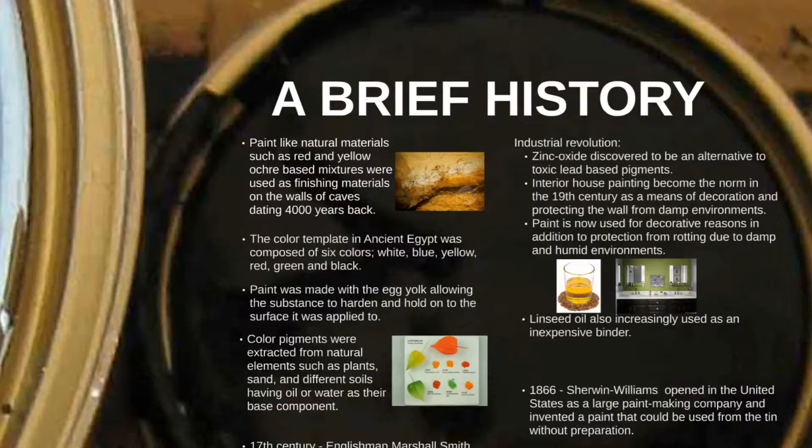Painting was used as a finishing material on the walls of caves at a time which dates as far as 4,000 years back. Back in the days, paint was made of natural materials such as red and yellow ochre.

Here are some historical facts that could sum up the evolution of painting over time. In Dendera, colored walls were found from 2,000 years back that remain very vivid until today. That is because a gummy substance was applied to the paint.

The color template in ancient Egypt was composed of 6 colors: white, blue, yellow, red, green, and black. In the painting process, they started by painting the entire wall in white, then tracing the outline of the design in black.

In Rome, paint was made with egg yolk. Therefore, the substance would harden and hold on to the surface it was applied to. As for color pigments, they were extracted from natural elements such as plants, sand, and different soils having oil or water as their base component.

England in the 17th century was very innovative in terms of its painting techniques. Marshall Smith invented a machine or engine for the grinding of colors in the year 1718. The operating process of this painting mechanism still remains unknown. However, that device increased the efficiency of pigment grinding drastically.

That machine was also very economic, and soon Emerton and Manby Company started advertising economic and low-priced paint that was ground using a labor-saving technology.

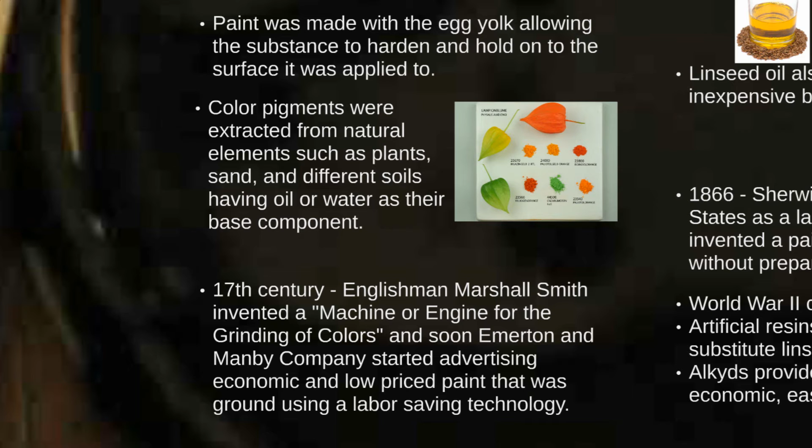The Industrial Revolution played a role in the production process of paint. During that time, paint was being ground in steam-powered mills. Zinc oxide was discovered to be an alternative to toxic lead-based pigments.

With the rise of technology, interior housing painting was becoming the norm in the 19th century onwards, paint being used for decorative reasons as well as for the protection of the wall from rotting due to damp and humid environments. Linseed oil was also used increasingly as an economic binder.

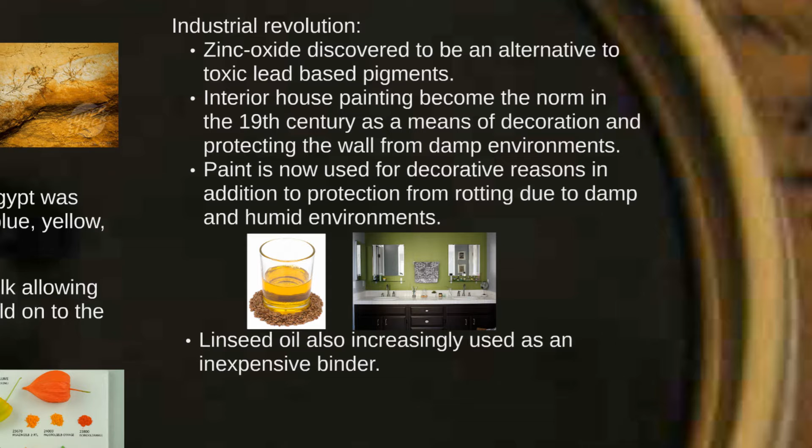In 1866, Sherwin-Williams in the United States opened a large paint-making company and invented a paint that could be used from the tin without preparation. This made things a lot easier for the user and gave more room for being able to paint one's home without the help of an expert or professional painter.

Last but not least, after World War II created a shortage in linseed oil, artificial resins and alkyds were invented to substitute linseed. Alkyds provided a base that was cheap, economic, easy to make, and durable.

Paint can be classified in 3 ways. The first is into architectural and industrial paints.

Under architecture, we have synthetic alkyd-based paints, emulsion paints, synthetic varnishes, processed oil and oil-based paints. And under industrial paints, we have automotive stoving paints, automotive refinishing paints, stoving electrostatic enamels, metalwork stoving enamels, wood finishes, heavy-duty paints, marine paints, and general industrial paints.

Matte paint, as the name suggests, is characterized by being flat or not shiny. It has an advantage of hiding imperfections such as brush marks. It is used for interior walls and painted ceilings. Matte paint should not be used in kitchens, bathrooms, or kids' rooms, as it does not wash out well.

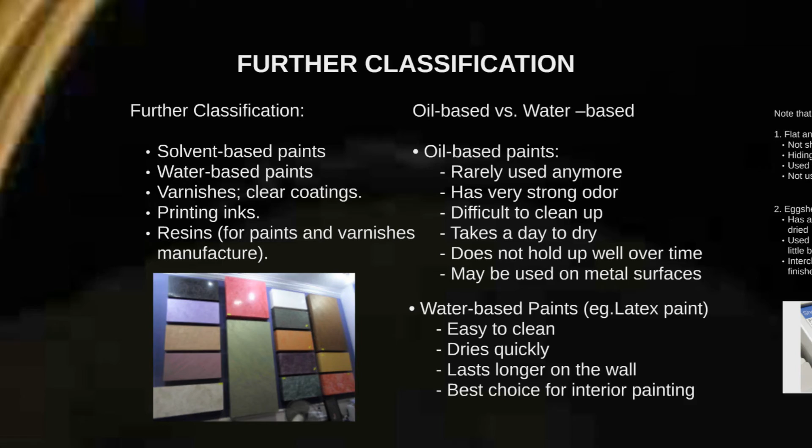Oil-based paints are rarely used anymore. They have a very strong odor and are difficult to clean up. In addition, they take long to dry and do not hold up well over time. On the other hand, water-based paints such as latex paint are easy to clean up, dry quickly, and last longer on the wall. They're the best choice for interior painting.

Pigments are solid particles that reflect the light rays in various manners to help prolong the life of the color of the paint and protect metals from corrosion. They have a general requirement of being opaque, chemically inert to secure stability in the bind, non-toxic, and low cost.

Pigments can either be organic or inorganic. Organic are more preferable due to their availability and greater benefits.

Solvents are the volatile part of the mixture dedicated to dissolving the binders, adjusting the viscosity, and maintaining a uniform thickness to the final coating of the painted surface. They can be classified mainly in the local market as mineral spirits, or xylene and toluene.

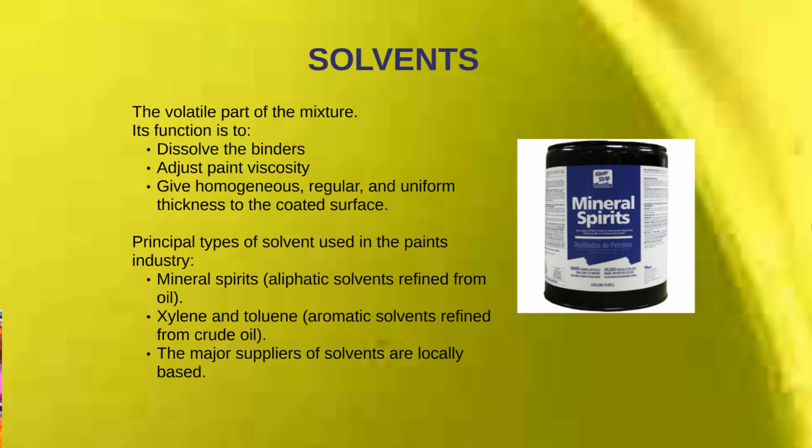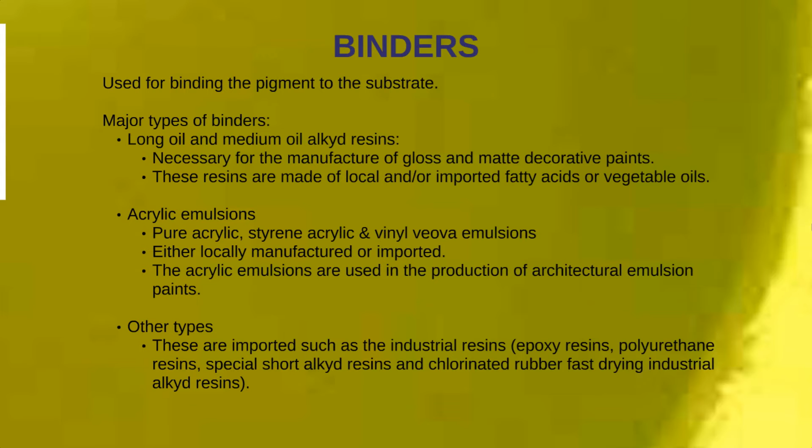The key to the paint mixture is the binder, which creates the bond between the pigments and the substrate. Three major types of binders include long oil and medium oil alkyd resins, acrylic emulsions, and other industrial resins.

Additionally, other materials such as additives, fillers, or extra raw materials are added into the mixture. The main additives seen in the industry are wetting and dispersing agents, anti-foaming agents, anti-skinning agents, dryers, anti-settling agents, plasticizers, fire retarding agents, and various other examples.

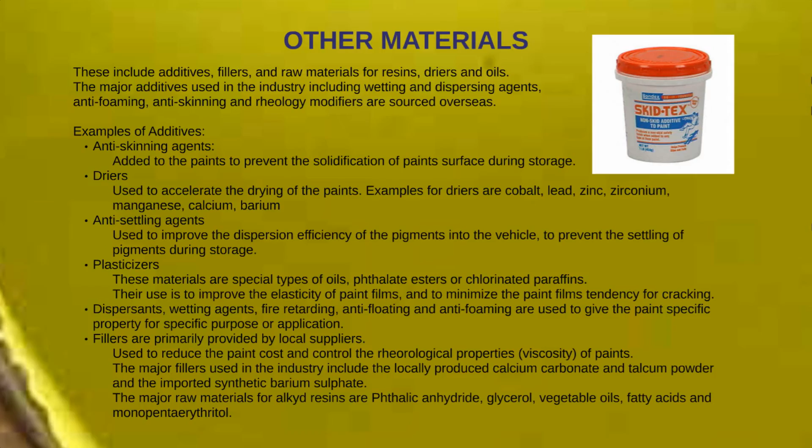Of the finishing equipment to be discussed, the primary tool is the paintbrush, mainly found in three different types, each intended for a different use. All have the same technique in their use and maintenance. Avoid dipping the full bristles into the paint, and they must be washed with gasoline, followed by soapy water, plain water, dried, and finally wrapped in a clean cloth.

Secondly, rollers, coming in various sizes, are used for covering larger spaces in a short period of time. Knowing this, it is not an efficient tool for corners. However, they can come customized with patterns for a decorative, hassle-free finish.

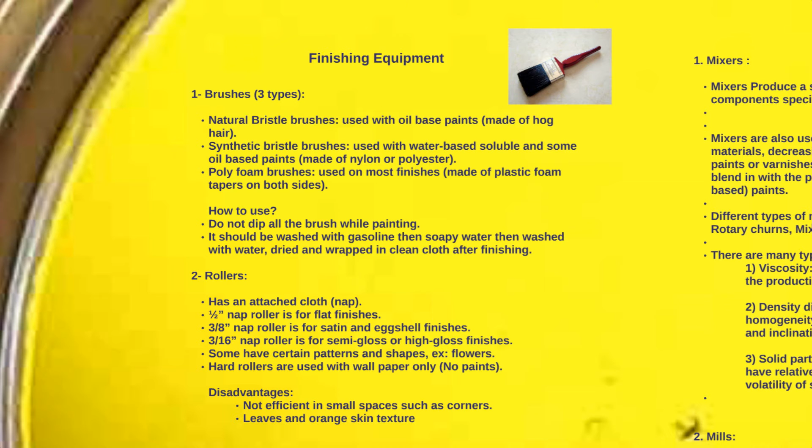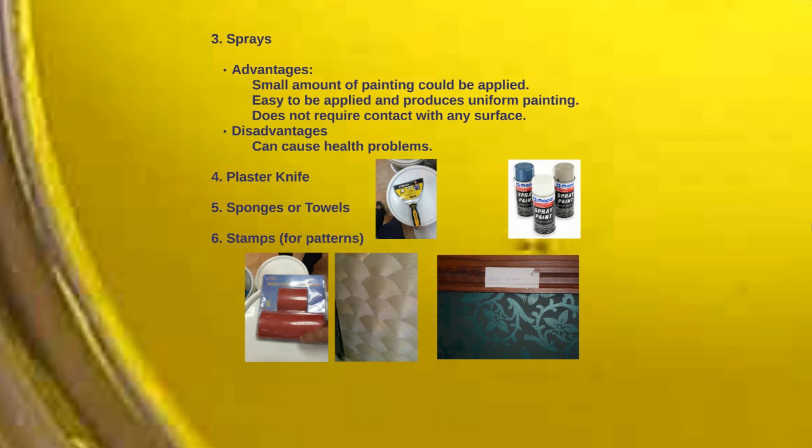For a fast-drying, uniform covering, spray paint is a suggestion, despite the health-impairing fumes it is known to discharge. Other tools include a plaster knife, sponges, towels, and stamps.

Upon creating the actual paint that is required, a mixer is used to combine the various components of paint discussed previously to create a homogeneous blend. Different types include manual, automatic, kneaders, colloid mills, rotary churns, or just mixing by air streams. The selection of a specific mixer is to be used depending on the intended viscosity, density, and solid particle size.

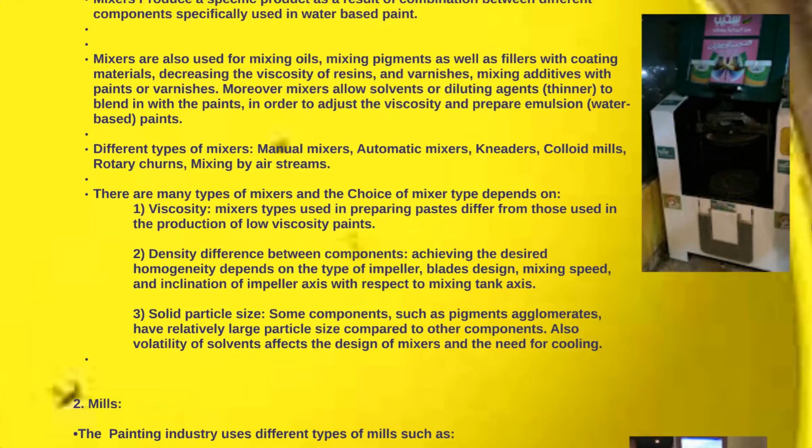To grind the paint, we can use either a roller or a ball mill. Roller mills cannot be used for paints containing high volatility because the mill is open, thus it would be released into the atmosphere. With ball mills, if steel is used, then only dark color paints can be used. However, with pebble or ceramics, lighter color paints can be grinded. More commonly, we see in larger modern factories using both vertical and horizontal sand mills as well as dyno mills.

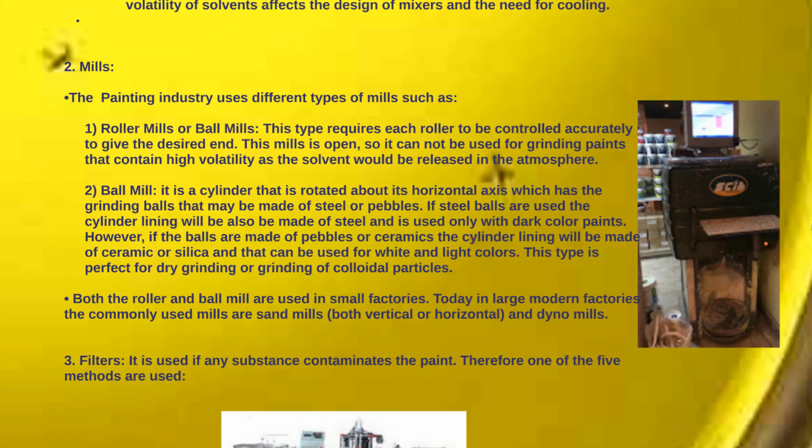Additionally, we also have filters, which are used to clear contaminated paint. One of five methods can be used: single-cylinder mill, fine screens, filter press, centrifugal separators, and settling for varnish purification.

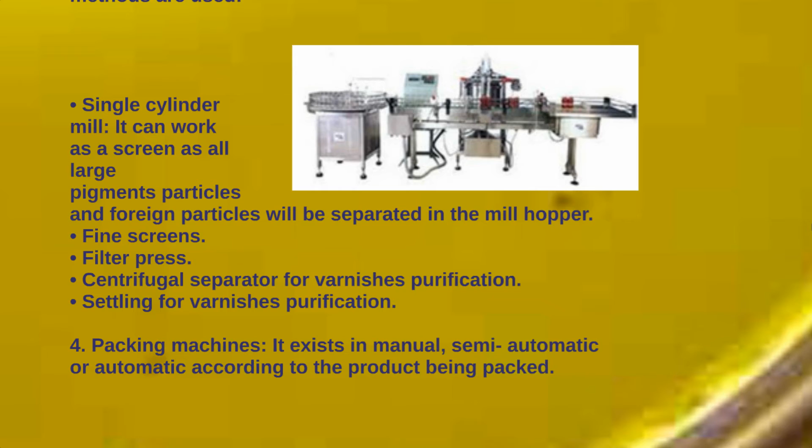Lastly, the packaging machines play an important role in packaging the paint to be shipped to retailers. The packing process can be manual, semi-automatic, or automatic.

The following is the application procedure for interior wall painting. Number 1, clean the surface by any of the following: sanding, washing, or scraping. Number 2, repair work through waterproofing, insecticides, and cement patching.

Number 3, insert the cement plastering. Plastering is added after being done with the brickwork, then paint can be applied. There exist 2 types of plaster: gypsum-based, commonly used in the ceiling, and cement-based, commonly used in the walls.

Number 4, fill the cracks and gaps, then add primer coating in cement. Number 5, use 2 layers of paste of similar colors. And number 6, open the crack and fill it with crack paste, which must be well matched with the paint that will be used, if any cracks appear on the walls. Finally, the final layer is the paint layer.

The manufacturing process is generally similar for all types of paint. There are 4 main steps in the manufacturing process.

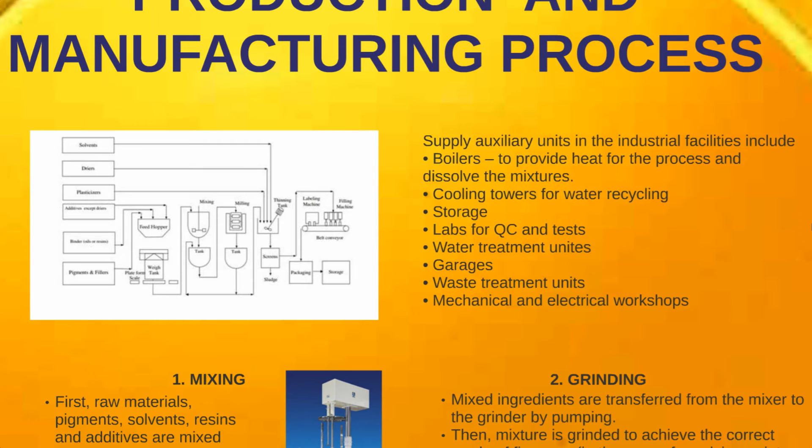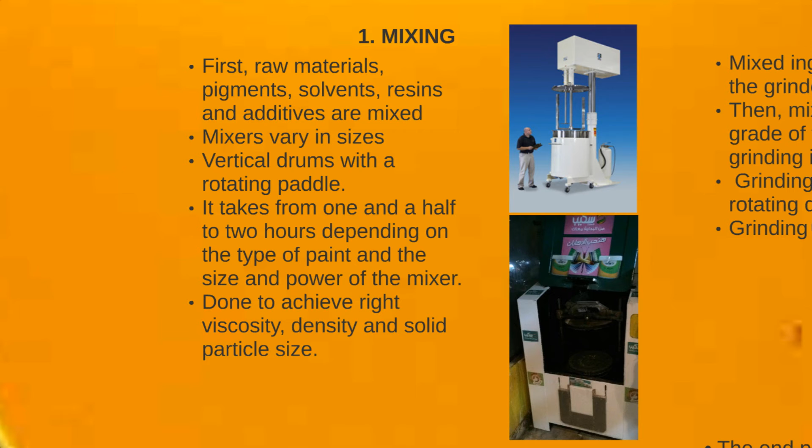The first step is mixing, in which the raw materials are mixed in mixers, which are vertical drums with a rotating paddle of various sizes. Mixing time varies from 1.5 to 2 hours depending on the type of paint and the properties of the mixer. The purpose behind mixing is to achieve the required viscosity, density, and solid particle size.

The second step in the manufacturing process is grinding. In that stage, the mixed ingredients are transferred from the mixer to the grinder by a pump. The mixture is then grinded to achieve the correct grade of fineness. Grinding occurs in rollers or bead mills, which are horizontal rotating drums full of steel balls or glass beads. Grinding usually takes about 30 minutes.

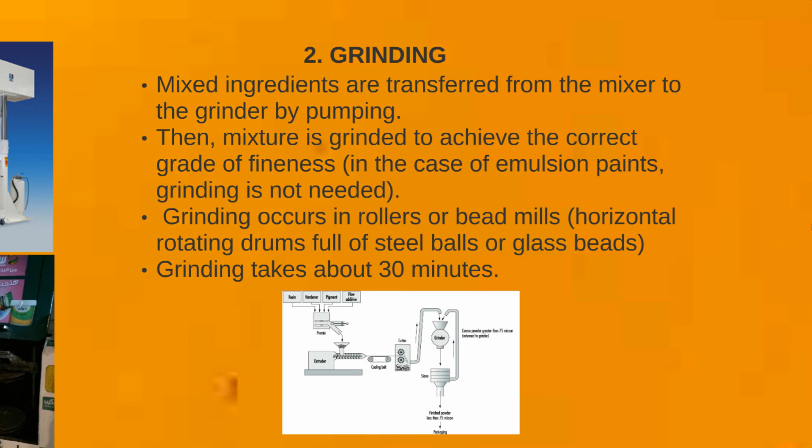Thirdly comes the finishing stage, in which the paint is transferred to finishing tanks where it is treated as necessary with further resins, solvents, and additives.

The fourth and final step in the paint manufacturing process is filling. In the filling stage, the finished product is filled into cans, which are then packed manually into cartons. The paint cans are filled using filling machines of different types: manually operated, semi-automatic or automatic, gravimetric or volumetric.

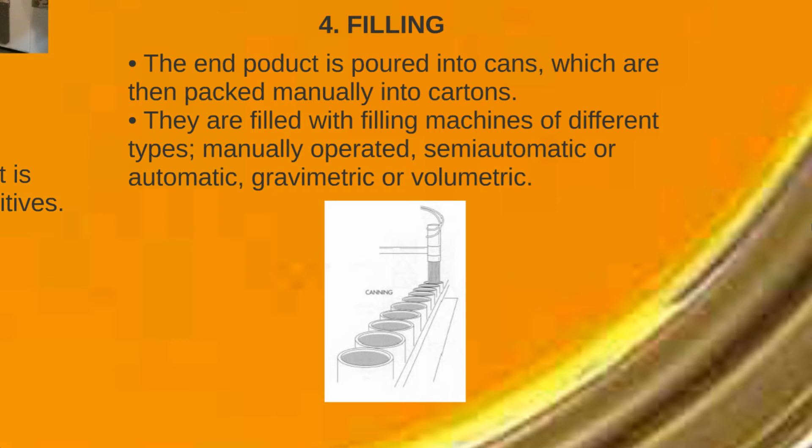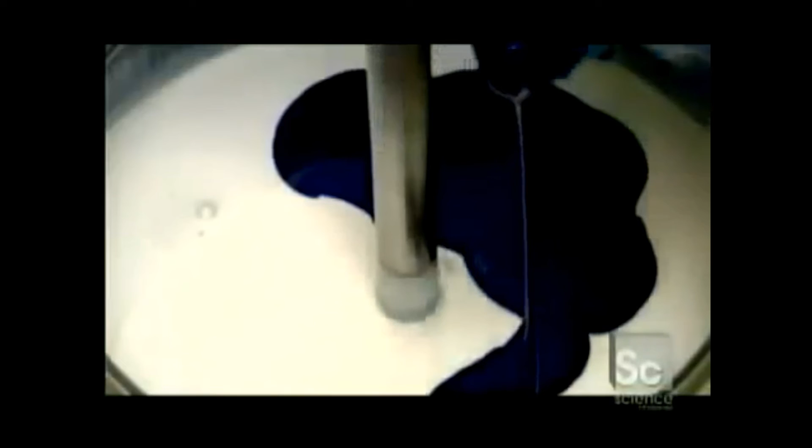The paint factory produces an uncolored base. The store then tints that base to the color ordered by the customer.

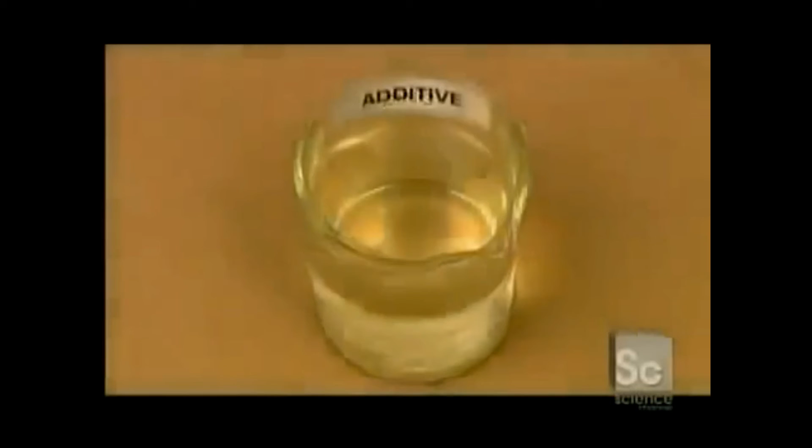Latex paint contains water, latex for adhesion, titanium dioxide, calcium carbonate, potassium, and zinc for mildew resistance, along with whatever additives the particular type of paint requires. For example, if it's paint designed for metal, a rust inhibitor is added.

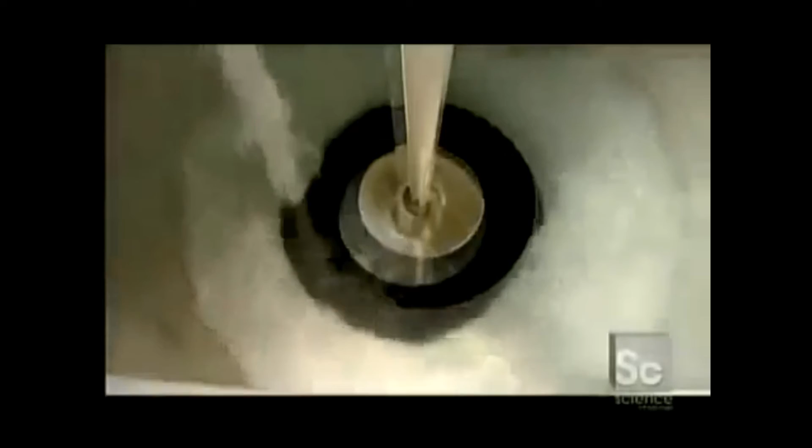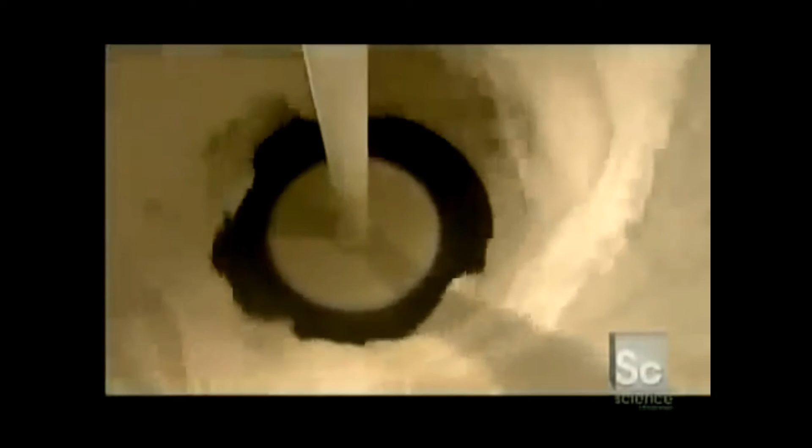They pump the water into a large mixing tank. Then they add a thickening agent and stabilizer to prevent the ingredients from settling to the bottom of the tank and to the bottom of the can once the paint is packaged. A vacuum duct sucks up the dust.

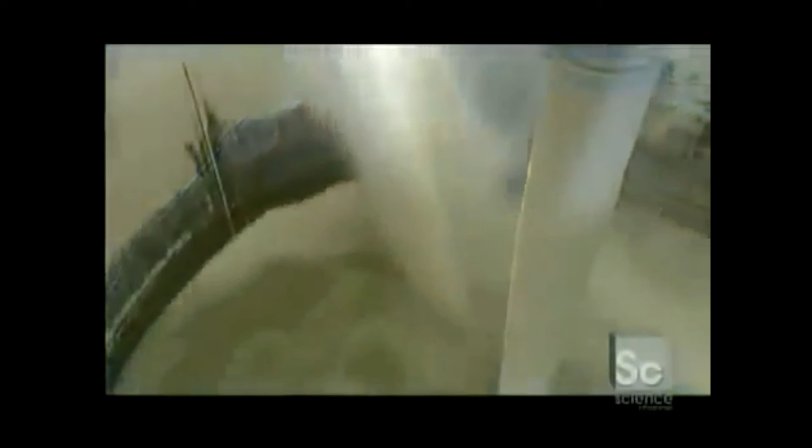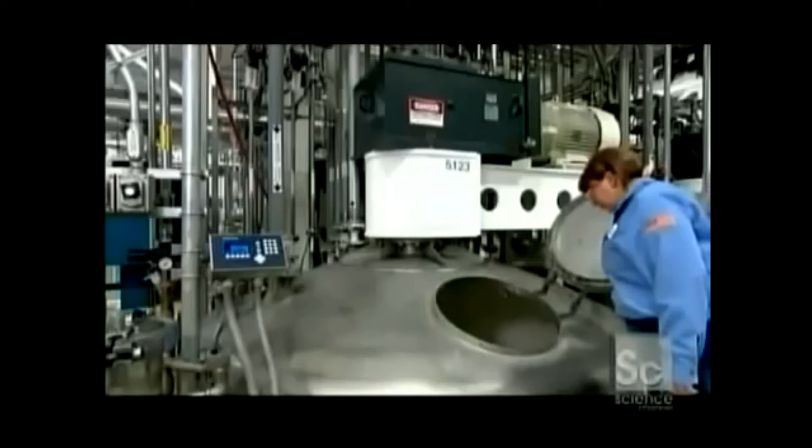One at a time, all the ingredients except the latex go in. There's a specific mixing time after each ingredient because proper blending is critical for quality. Now they pump the tank's contents into another mixing tank that contains the latex. After 4 to 6 hours of blending, the industrial-sized batch of paint base is finally ready.

The factory subjects a sample from every batch to extensive quality control testing. This viscometer measures the thickness of the paint.

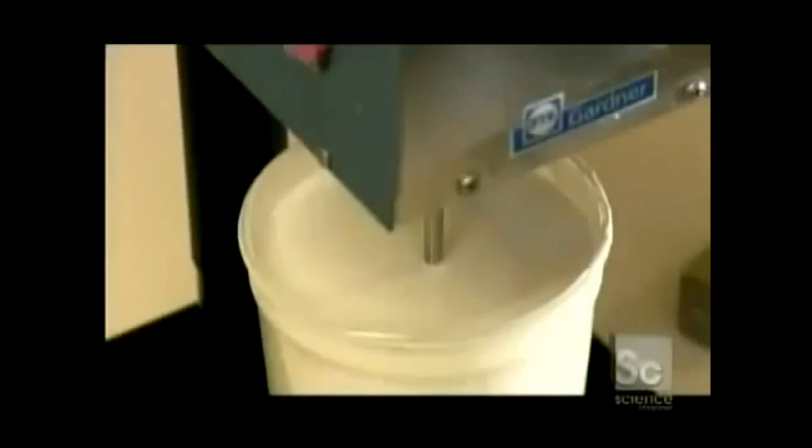This test assesses how well the dry ingredients have dispersed within the mix. This tells them whether the mix is blended well enough to move into the second tank containing the latex.

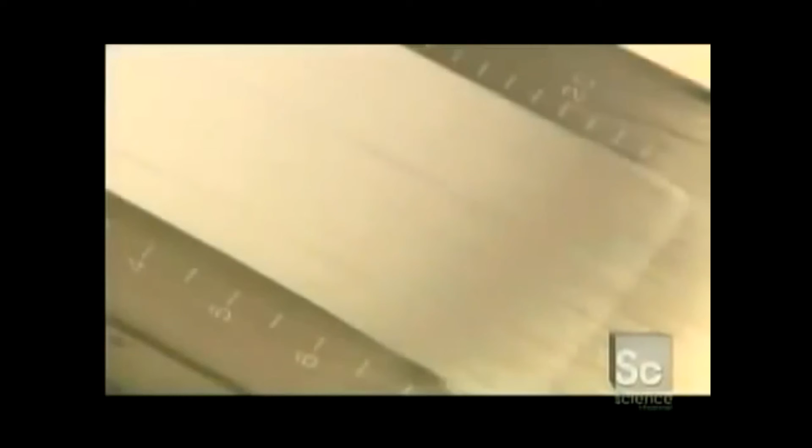Technicians also conduct color tests, adding recipes of liquid colorants to a gallon sample. This is to ensure the shade comes out exactly the way it's supposed to.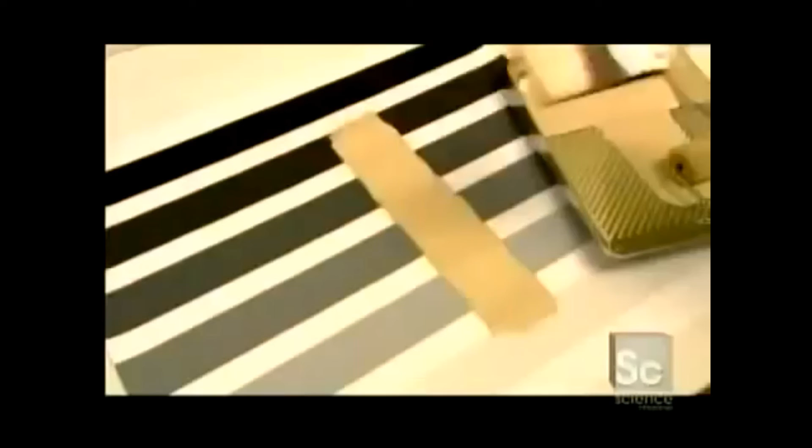To check if the paint covers well, they brush it onto test paper. The stripes provide a contrast so that any defects in the paint, such as foam or grit, will show. This test evaluates hiding power.

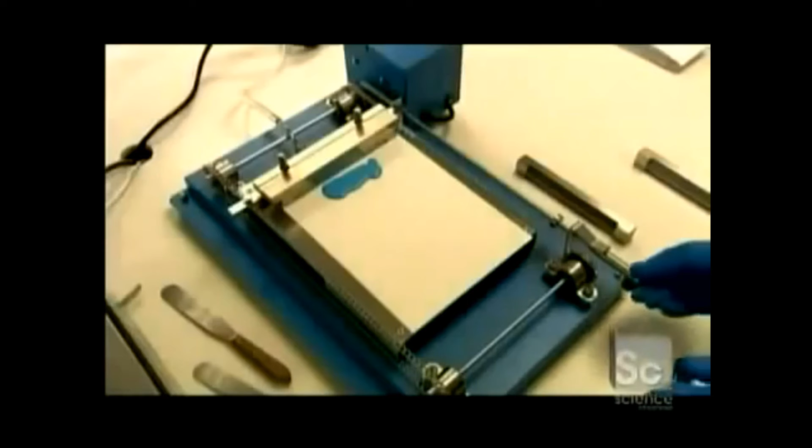Once the paint sample dries, they analyze its color properties with a machine called a spectrophotometer.

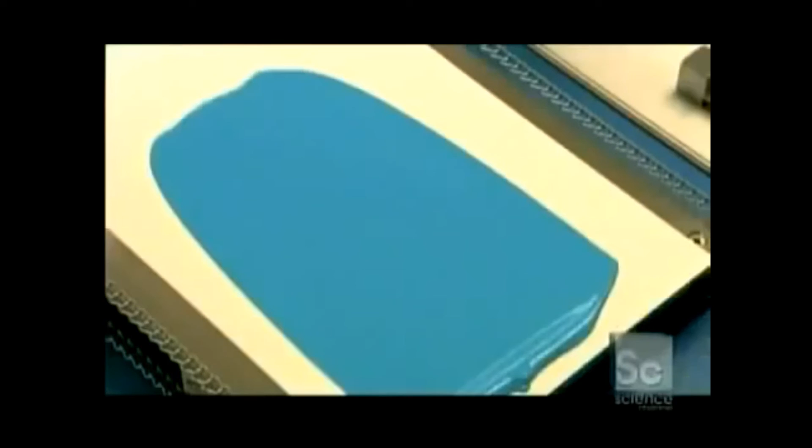Once the batch passes inspection, it proceeds to packaging. Latex paint contains about 60% water, which corrodes metal, so the steel cans are lined with an anti-rust coating.

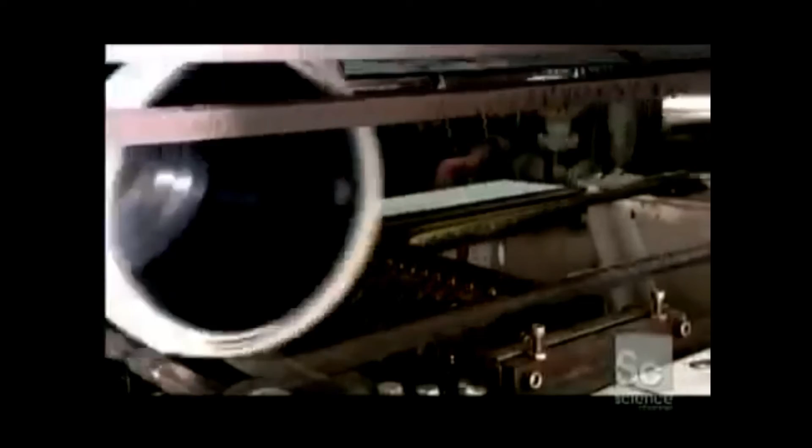The cans run over a glue applicator, then over a label, which instantly sticks to the adhesive.

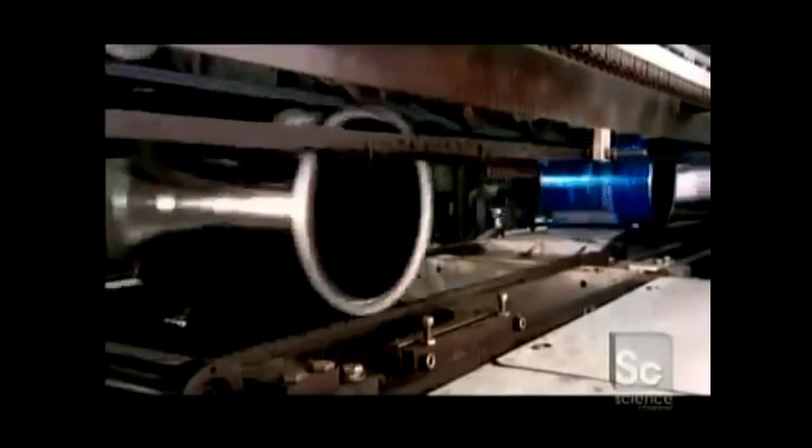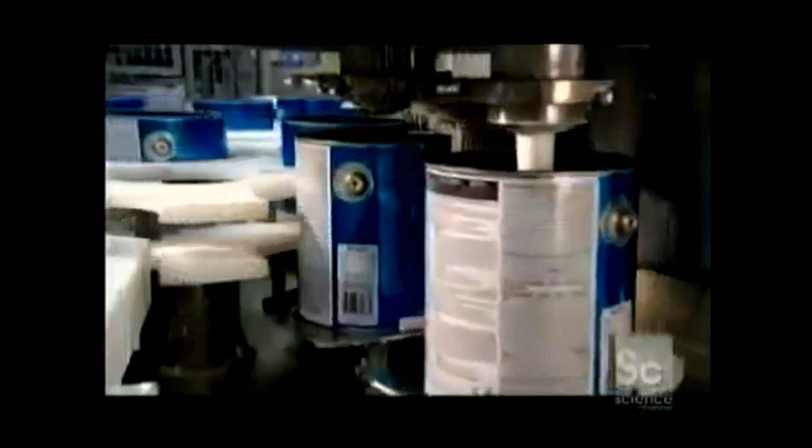The next stop is a filling machine. Each can sits on a scale that's positioned under a dispensing nozzle. Once the scale detects the correct net weight, it triggers the nozzle to stop.

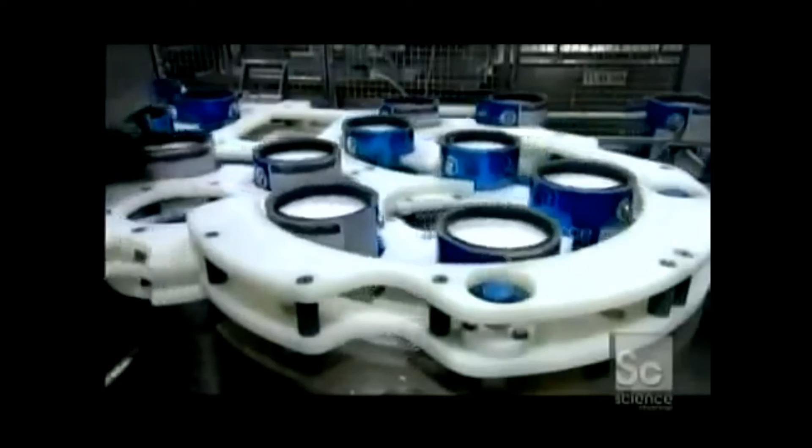From the filling machine to a lid dispenser that drops a cover onto each can.

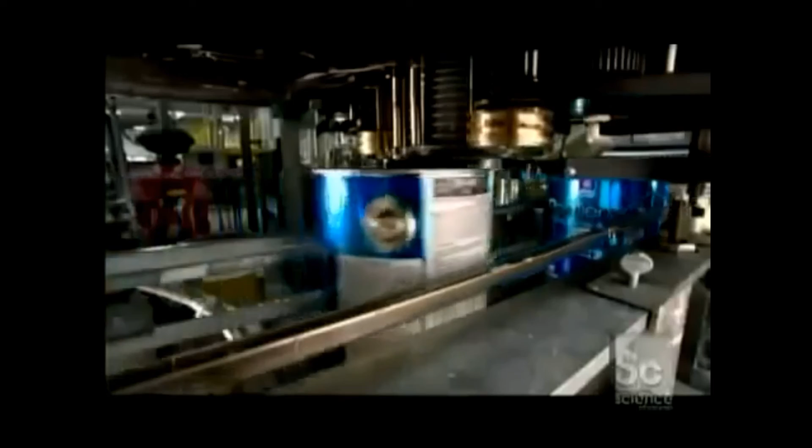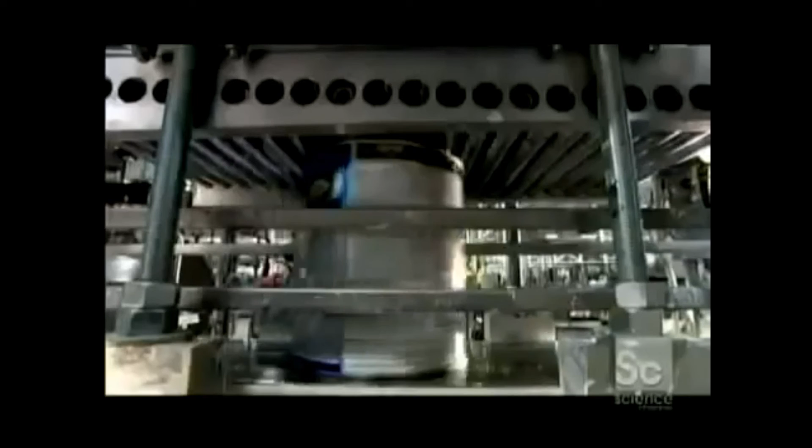Then it's onto what's called a lid press. As each can passes underneath, a row of cylinders gradually presses in the lid.

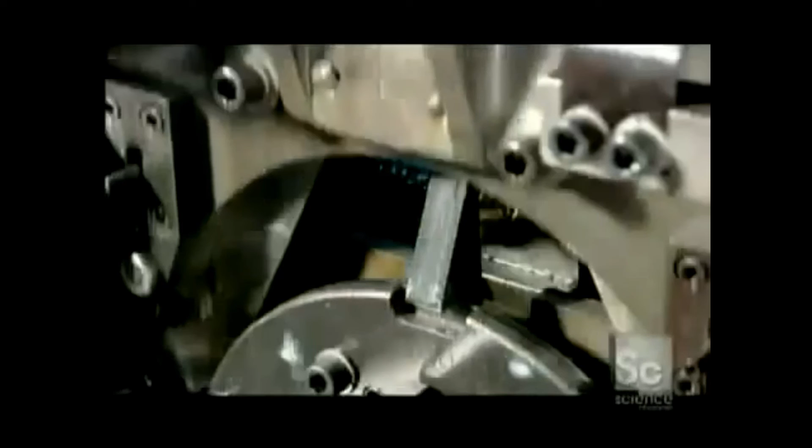The next machine, called a baler, attaches a curved handle made of steel wire. It locks the handle ends into metal discs on both sides of the can.

The factory varies its formulations to produce paint in lusters ranging from flat to high gloss, and for interior and exterior use, making sure it's got every possible application covered.

The Egyptian paint industry is a highly fragmented one, with several players including homemade paints produced by the informal sector. Around 50 to 60 local major producers are satisfying most of Egypt's demand. However, only 3 companies export more than 65% of this value.

And now for a quick summary of the market. An estimated 462,000 tons of architectural paint is being consumed annually in Egypt. The informal sector represents about 15% of this number, while the formal sector contributes 350,000 tons of paint, with an estimated value of 1.8 billion pounds.

The architectural market is composed of synthetic paints, emulsion paints, synthetic varnishes, and tinted paints. What we see here is the market distribution by volume and value.

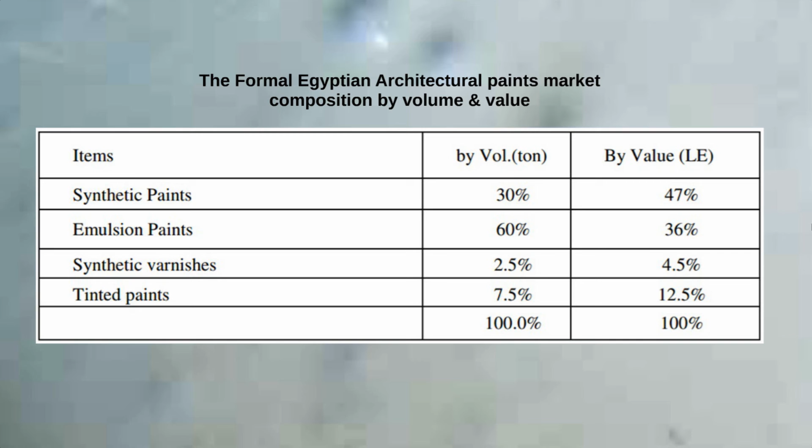The consumers and market segments are divided as follows: regular paint traders, tinting paint traders, consulting firms, contractors and decorators, painters, and owners of buildings and houses.

There are 4 critical service requirements for all paint companies. The first is product quality. The second, product consistency, as in minimum variation between batches, cans, and orders. Third comes availability, which also implies speedy delivery of the material. And finally, price. The paint industry in Egypt is highly competitive, and therefore fair pricing in the market is a key concern.

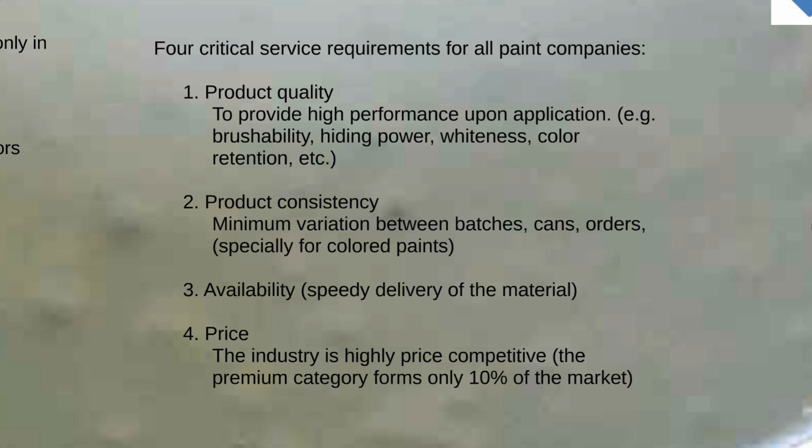The architectural paints market is divided into 3 price categories. The first is premium, which represents 10 to 15% of the market and is dominated by Jotun. The second is the middle category, representing 70 to 80% of the market, for which Pachin is the key player. And finally, the third is the economic category, for which there is no key dominator because of the high competition.

In terms of the local market supply, the competition structure is based on the type of paints being sold. Pachin is the market leader for synthetic paints, followed by Sipes. For emulsion paints, Sipes is the market leader, followed by Pachin. For varnishes, Mido, Kapci, and GLC are all key players, while Jotun is the market leader for tinted paints.

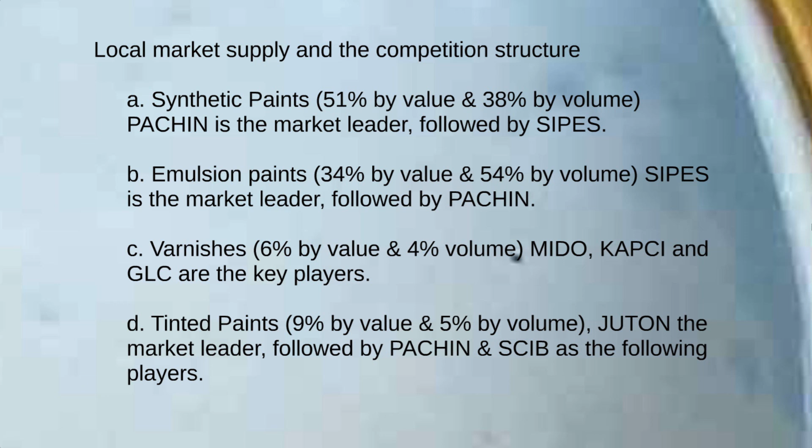Now we will discuss some key companies in the industry in Egypt. Perhaps the best known worldwide, Jotun is a Norwegian company established in 1926 and introduced to the Egyptian market in the last decade. Its factory is located in Ismailia.

Pachin was established in 1958 and is currently the market leader in Egypt in terms of production size, sales volume, and value. Its factory is located in El Obour city.

Sipes was established in 1978 by the Musa family, but 60% of the shares are now owned by an Indian manufacturer called Asian Paints. The factory is located in the 6th of October city and the headquarters are in Zamalek.

SCIB was introduced to the Egyptian market in 1989. It is also available in the markets of several other Middle Eastern countries. Its factory is located at the 10th of Ramadan city.

Some other prominent companies are GLC, located in El Obour city, Al Jazeera, and National, which are both Saudi-based companies.